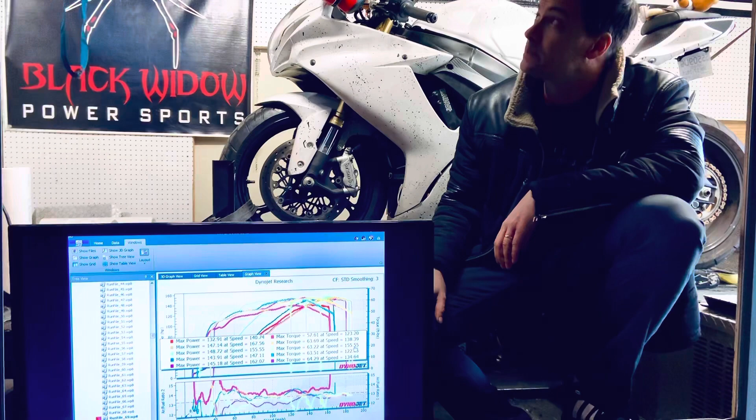And she is making some crazy numbers. So we got a GSXR750 on the dyno, 2012. We are tuning it through the ECU, so it's flash tuned. We got E85 in it right now. It will also be tuned on pump gas, both through the ECU. So you guys see what it does.

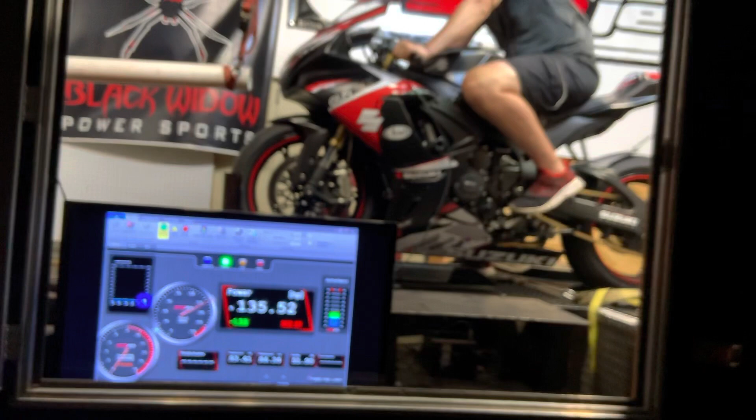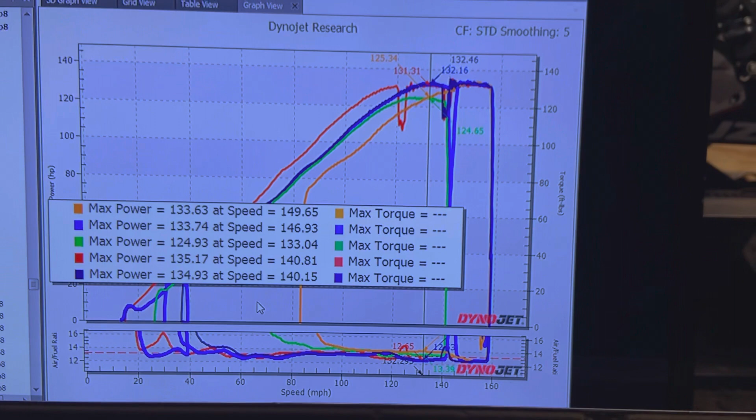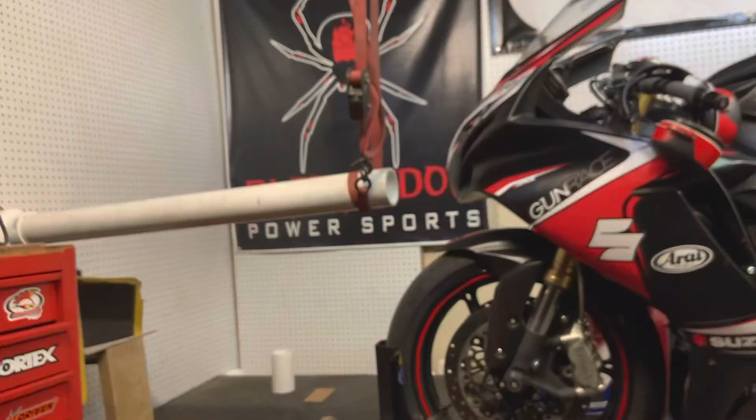So we started off with 125. We're now at 135 on that red pull. Huge gains on the top end of this bike, down there too as well. Track bike, probably be at Harris Hill soon. That's our ram air setup. We were running ram air on this last run. These bikes do not gain much on ram air, about 2 horsepower or so.

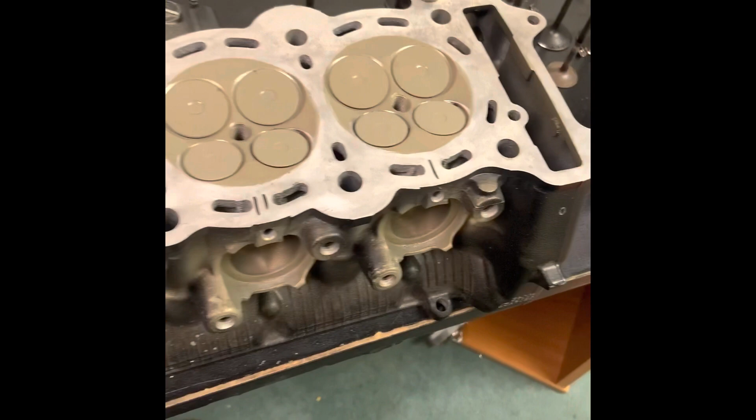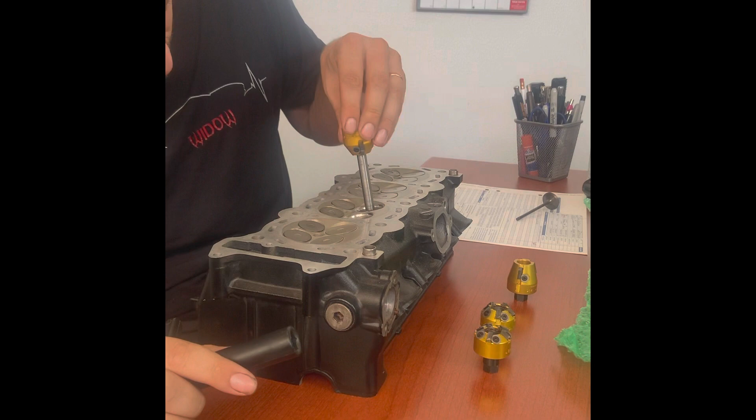So this head's all ceramic coated, and in the process of ceramic coating we get a little bit of ceramic on our valve areas. So I'm cleaning up all of the angles to make sure that they're where they should be. Valve out of here. I got our exhaust one cut. Ceramic coating in the exhaust port. This thing should make some really awesome power.

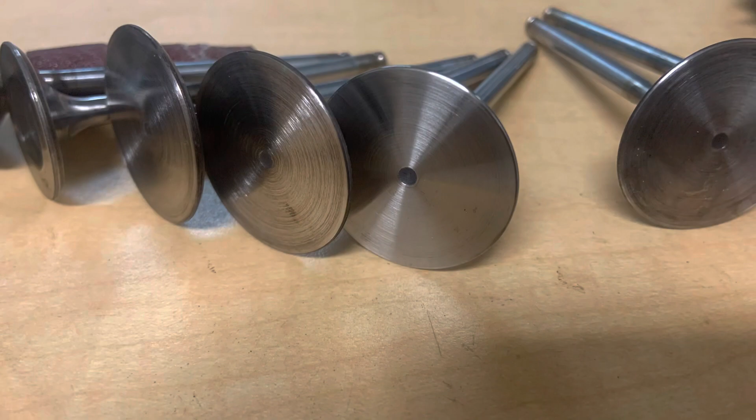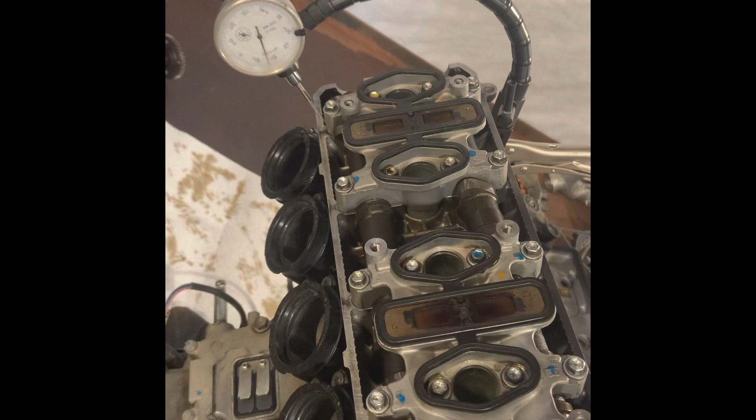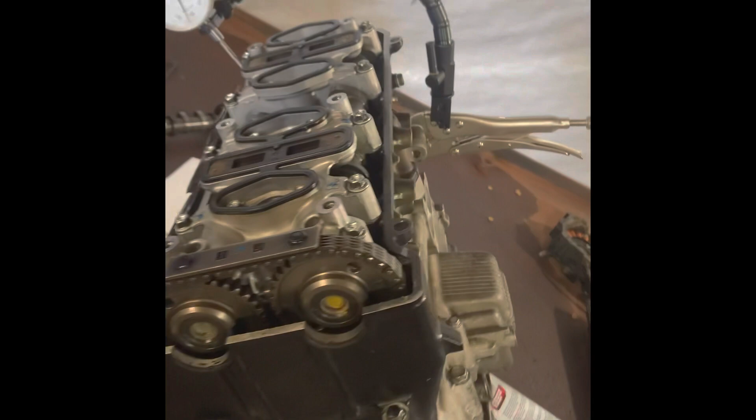We got our valve clearance set up. We use a couple special tools to be able to press open the valve when we're rotating it around, make sure that we got clearance at all the correct spots. We got ceramic coating on this head and +1 millimeter valves on the exhaust. This thing will be on the dyno in a couple days.

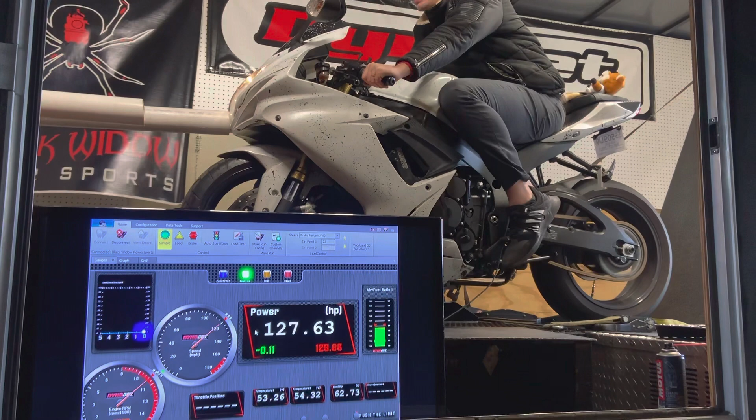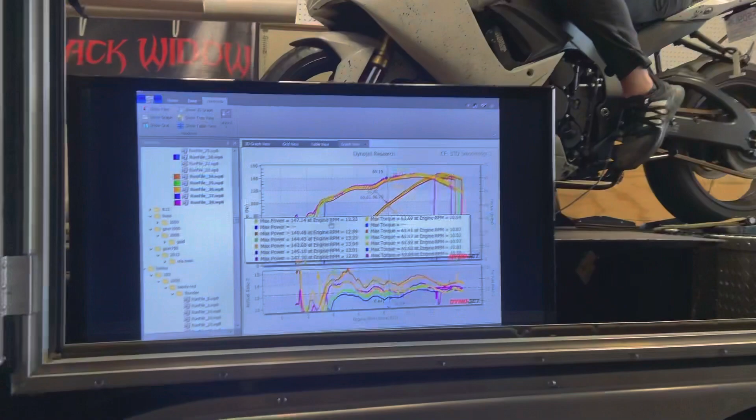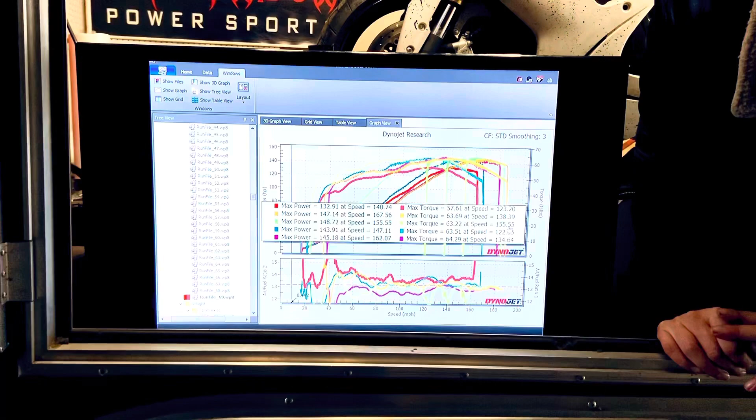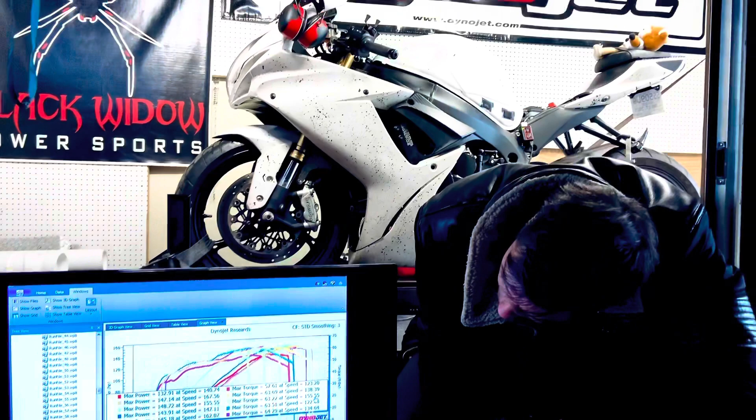133 is one that I have on YouTube. It's a blue GSXR750. This thing came to us blown up, so we didn't have a previous number. So we're using that as the same comparison, since it's the same gear ratio and a similar exhaust. We are now making 148 and 64 foot-pounds of torque, which is just unreal of what this thing can do. I can't wait to ride it on the street. We'll have a video of that later too.

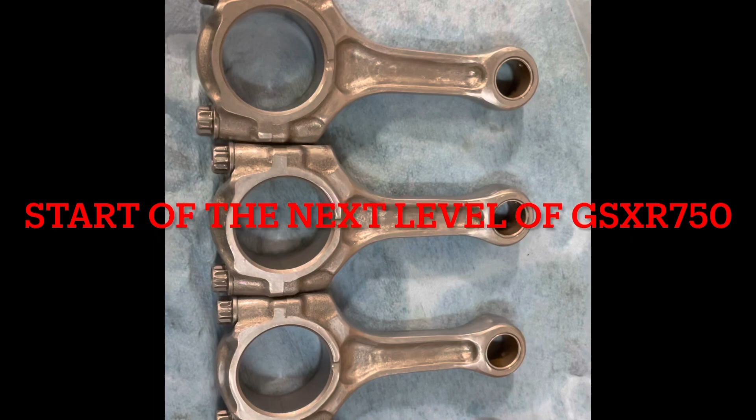Polished, ready to go in the 750. Transmission is back from the polisher, and I must say I'm impressed. Everything spins freely. I'll try and do a video of it spinning once it's in the bike. Or possibly a back-to-back. I have another transmission in another 750 that I can compare it against.

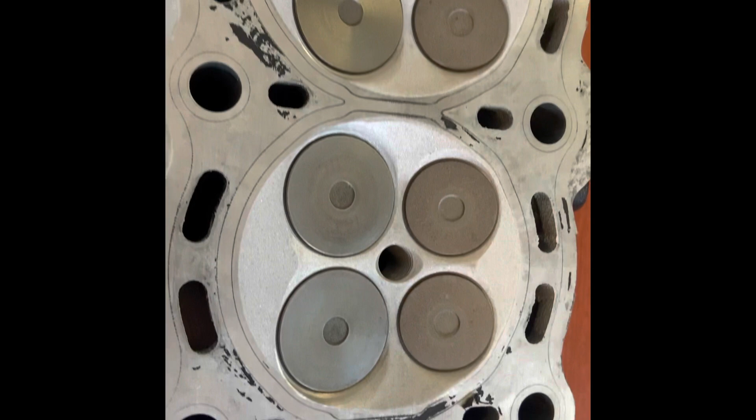So we got another head out of the blaster. Got all the combustion chambers dialed into what we want. Time to seal up all the mating surfaces, razor blade this off, and get ready to spray it. Ceramic coat, that is. Time to make some real power.

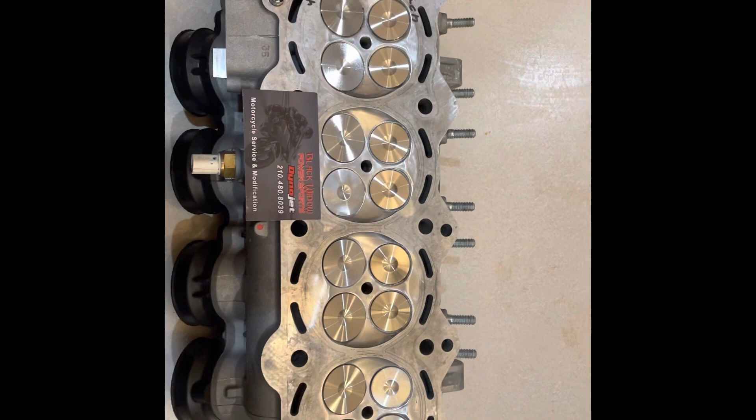Got two examples of cylinder heads before we go and take them over to the machinist and have a slice taken off. ZX14 head. This one will also be ceramic, just like the 750. Normally I would have already done the ceramic after the machining, but we can put more ceramic back on there after. And those stainless valves look beautiful. Too bad I'm going to cover them with ceramic and make them look like that. A different kind of beautiful.

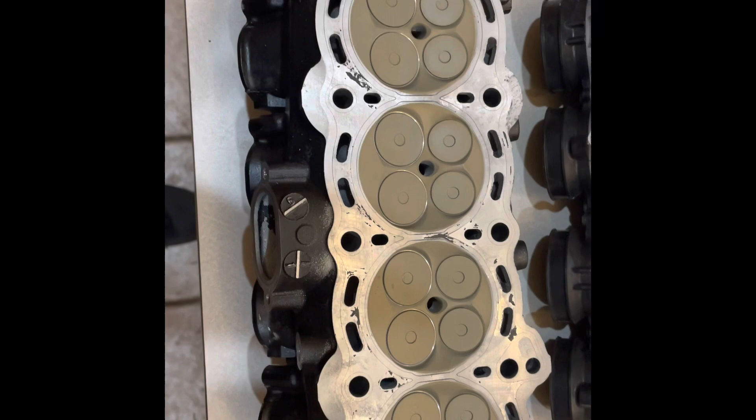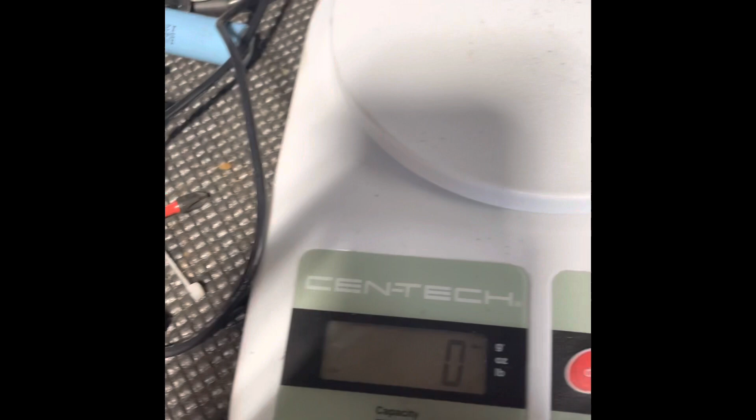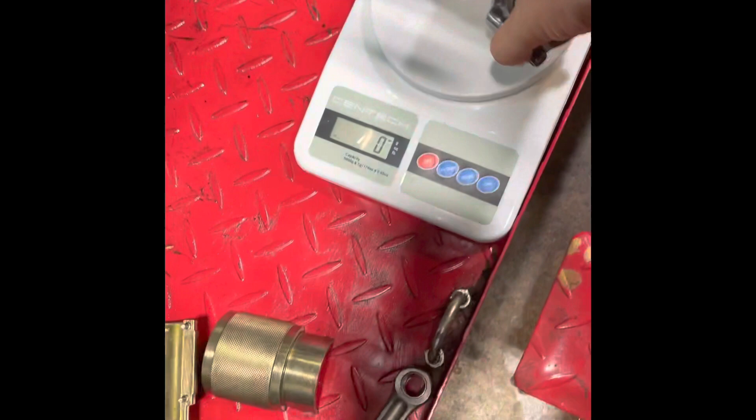I got the difference between the modified piston and the unmodified piston. So there's an unmodified piston and a modified piston. 3 grams out of it, but we also added a gram or so with the ceramic coat. So we got the stock rod. And we got the polished rod. 123 versus 128. All the seats are all cleaned up. This motor's ready to go back together.

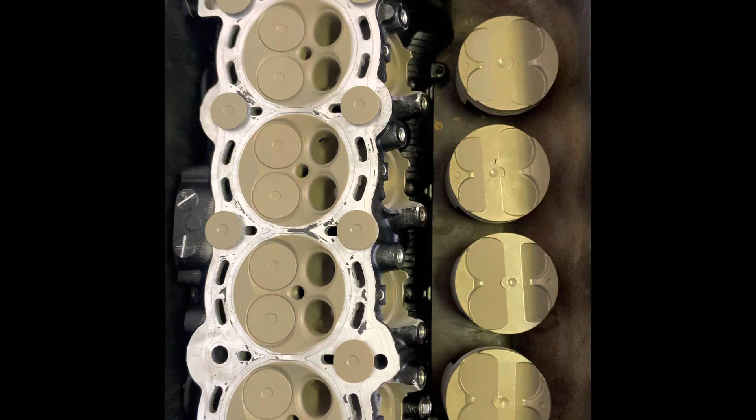All done. 750. Just gotta wait for them to cool down. Coat the skirts on the pistons. We're ready to go. Another ceramic coated GSXR 750 head. Done. Ready to go on the motor. Pistons are still upstairs drying out with the Teflon on them. Once those pistons are ready, this baby will be ready to go back together.

So we're cleaning back up the ceramic, at least the valve seats, where these angles are already set, but I do have a triple angle cutter going in here. A few more passes, that'll all be cleaned up to what I had before.

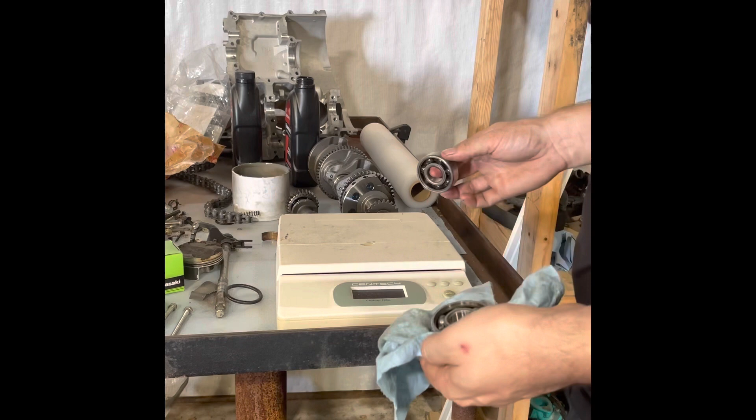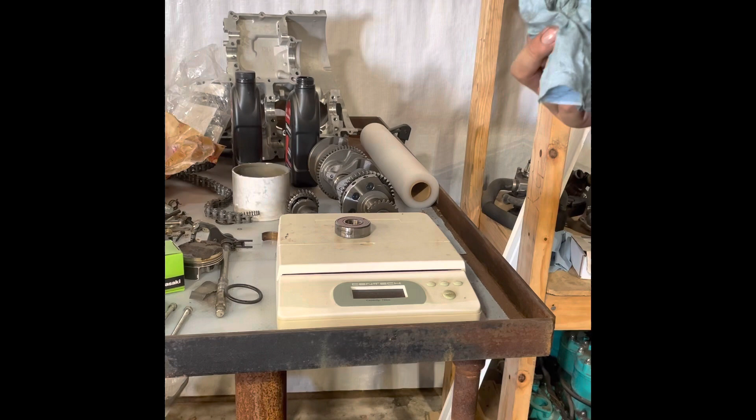And bearing number 2 for the same shaft. Out. We got 4.2 ounces and 5.2 ounces. So again, another ounce difference between one and the other. Now we're going to put those back on the shaft and get this thing.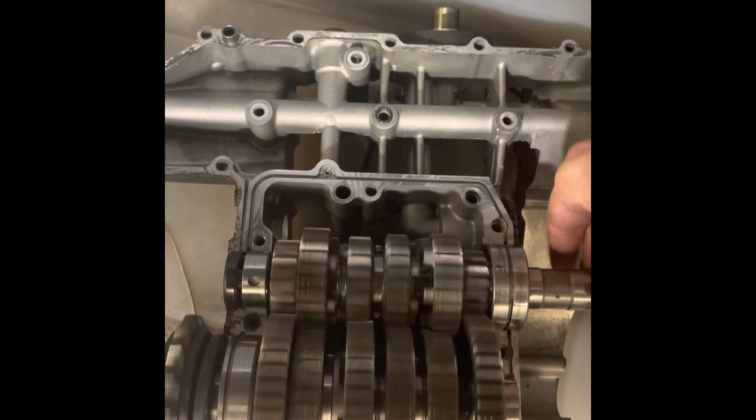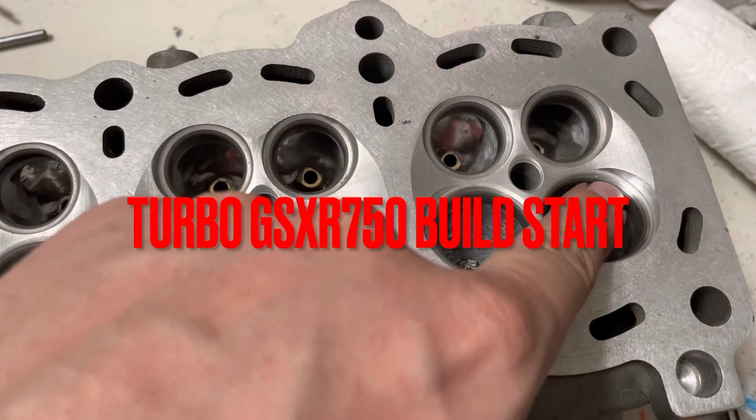A polished transmission versus just stock. Granted, this is a GSXR 1000 transmission. This is a 750, but this is a polished transmission. And just wow. Can anyone see the difference between this one and that one? Or, let's get this out of the way. These ones are almost finished. But between that, and that. So it's kind of crazy.

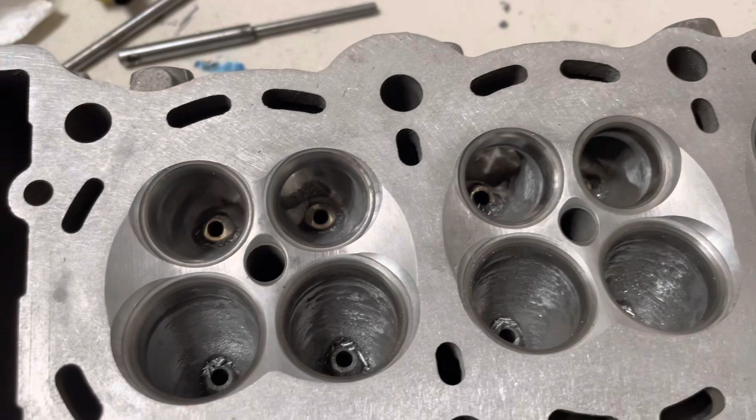750 chamber ready. Valves are cut for the bigger size. This one will get a stainless set, because this one is going turbo. Another 750 head ready for ceramic coat. Stainless valves on this one. This one's going to see some boost and a good hell of amount of it. Still waiting on pistons and rods.

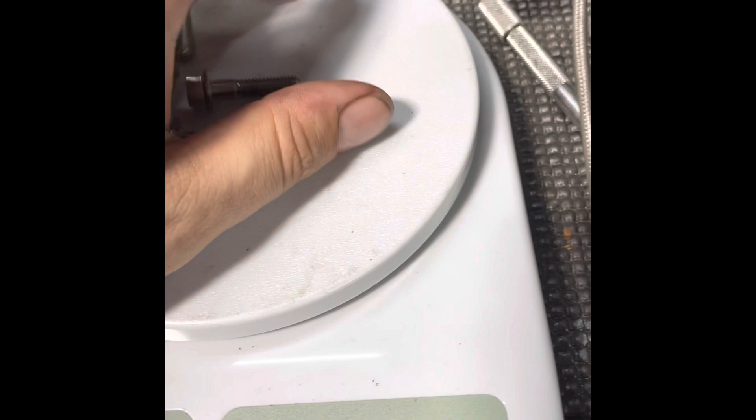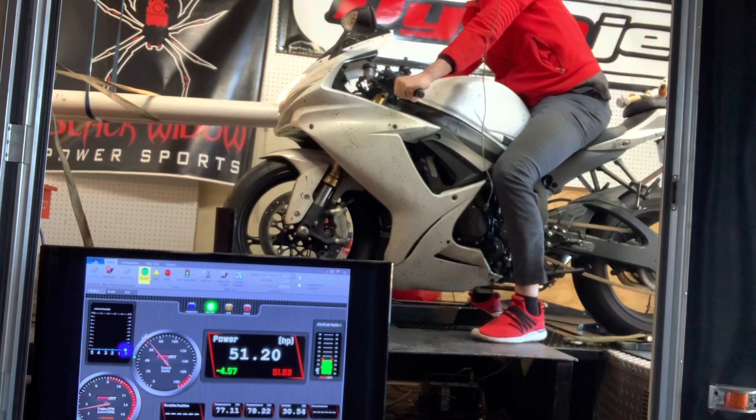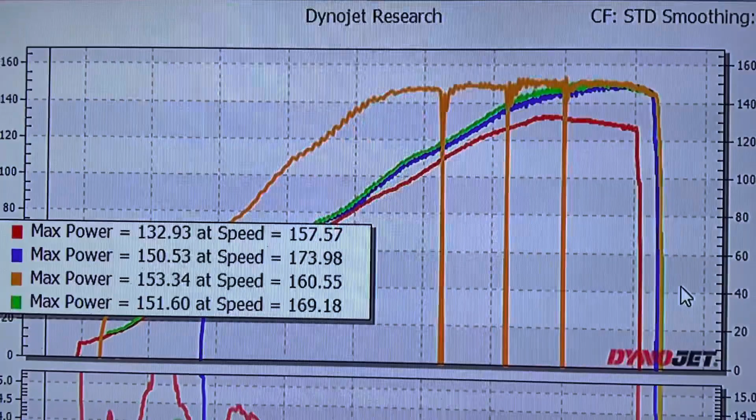Got our back-to-back runs up on there. We got our before. We got our blue line, which is our pump gas with some additive to it. And then we got our green line, which is our E85, regular pump E85. And the orange line is E85 ran, you know, through the gears that you just saw.